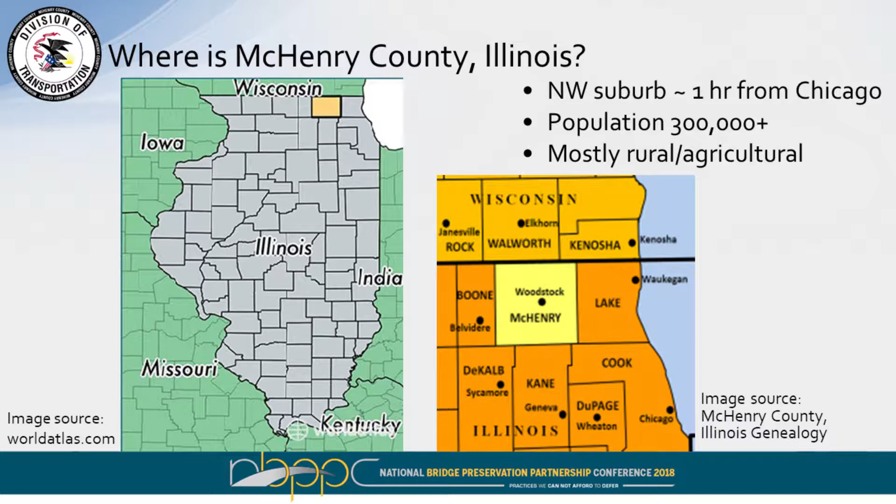McHenry County is really rural, very agricultural. There's one main corridor that's a 6-lane road, and other than that, most of the other highways are 2-lane. They carry farming equipment and there are truck routes throughout different parts of our county. But it's a lot of county highways, which is really pleasant when you drive to work in the morning, I have to say.

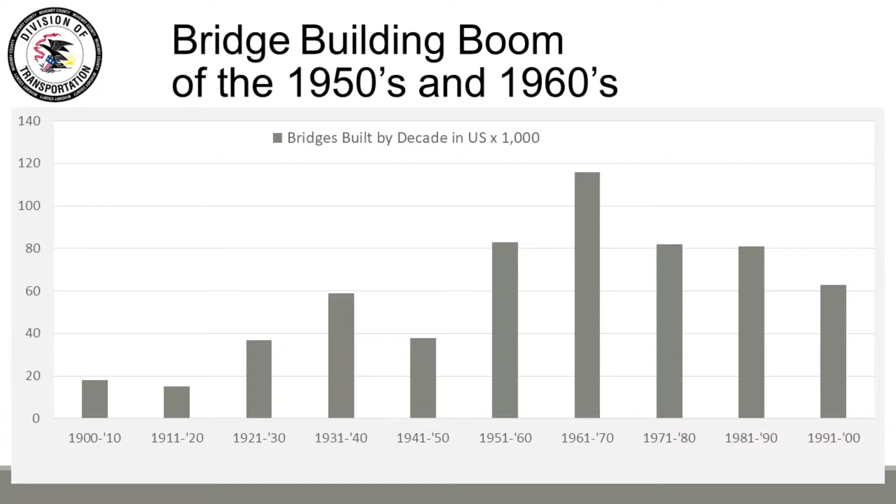This slide is a little bit about our history of bridges in general. With the automobile in the 1930s, we didn't have too many bridges built in the early part of the century, but as we get into the Industrial Revolution, we have trucks delivering materials. We had a big spike of construction in the 50s and 60s, and then it tapered off.

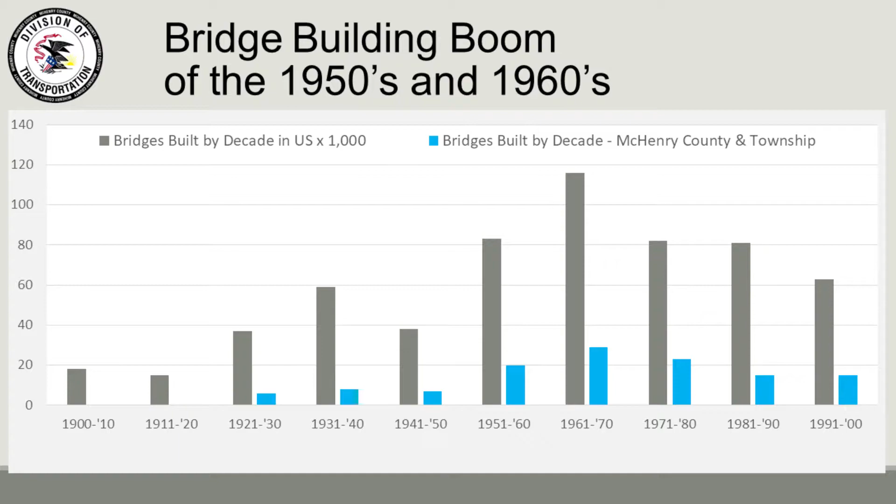Similarly, our bridges in McHenry County have the same kind of trend. In the 60s, we had most of our bridges constructed. I just wanted to give a brief overview that we had a similar timeline when we built bridges to expand our network in our county.

So what does our inventory look like? We have an inspection company called Willett Hofmann that does our annual or biannual inspections, and they helped put this together. I actually stole a lot of these slides from my supervisor at Willett Hofmann - I'm going to say, sometimes taking the easy way out. But Willett Hofmann does our inspections and itemized our bridges in this nice little summary.

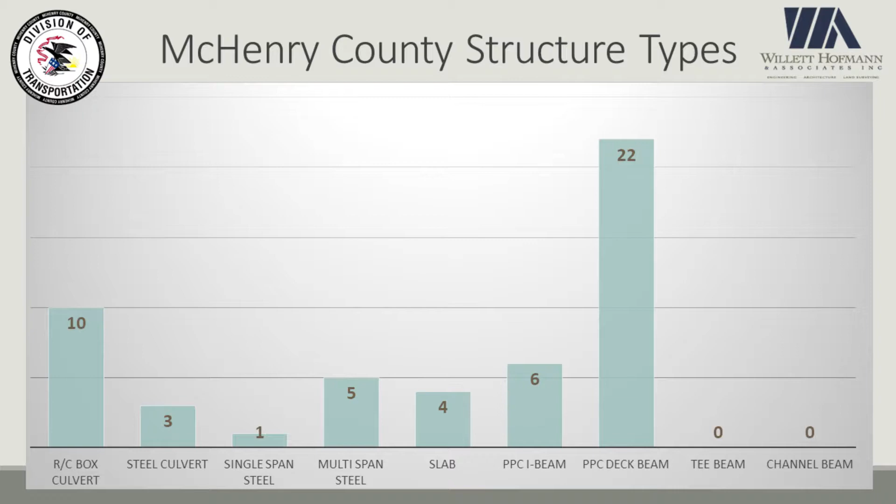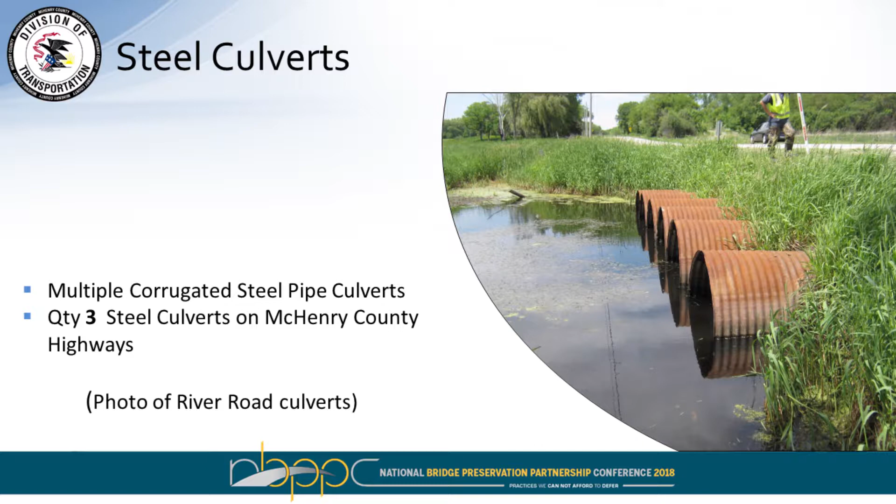The presentation we just listened to on culvert lining is of interest to me, because I know at some point these culverts, 6 sets of culverts that are underneath a fairly busy road, are going to need some attention. We check those periodically, go out and look to see if they're corroding on the bottom. They're holding up fairly well, but they're always in standing water. So unfortunately, it's just a matter of time until these have to be addressed.

Do we do a culvert or some other format? It might be less expensive and easier to do the lining process that Scott Kelly talked about in his presentation. So I'm certainly going to follow up on that, and that's exactly why I came to this conference - to see about alternatives. We have about 10 of these box culverts.

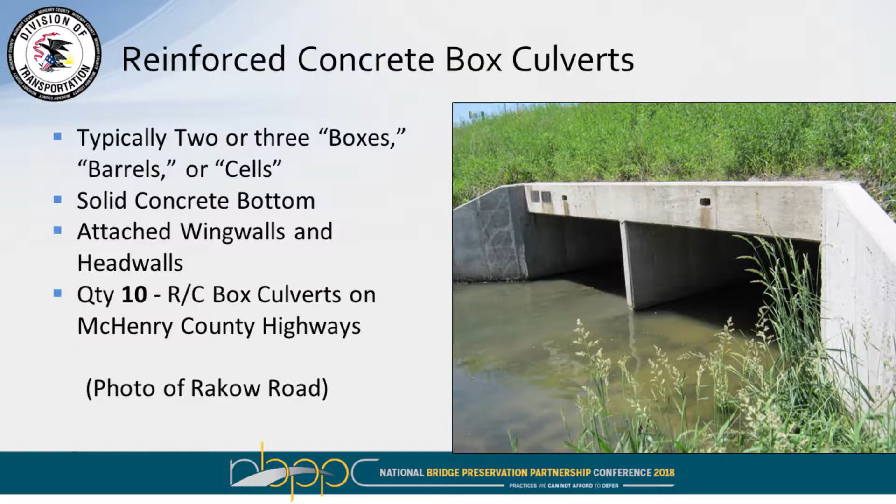Some of them are double, some are triple. In fact, we had a box culvert right down the road from our office where we replaced the wing walls. They're holding up fine - most of them are doing a good job, not really creating any troubles for us. But the wing walls on Nelson Road, that one we had the contractor remove because they had separated from the edge of the box culvert. So they pulled the old wing wall out.

They put temporary shoring in with steel piles to hold the embankment, and then placed steel piles exactly in the same footprint where the existing wing wall was on both sides of the road. So now that should hold up a little longer, and the floor of the culvert looks fine. There's some surface cracks that we fixed with epoxy, but overall, now at least we won't have a cave-in.

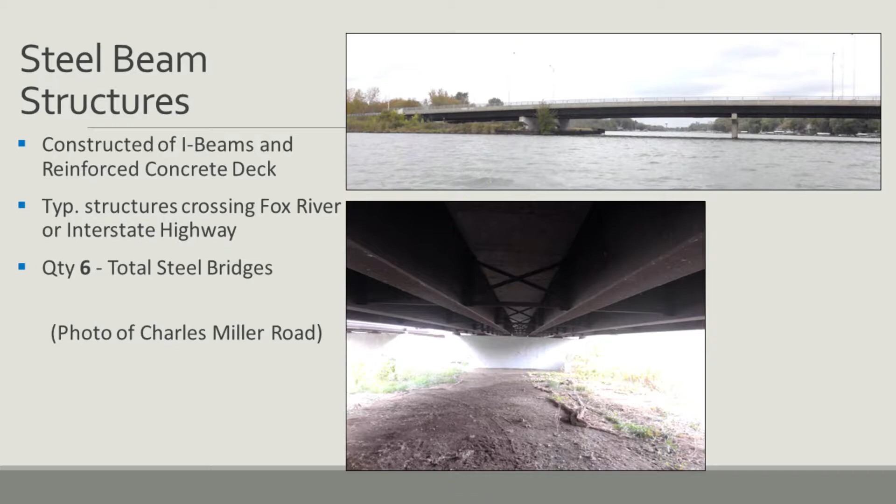Okay, so this is our flagship bridge. This is the longest bridge in our inventory - about 650 feet. It's one of our few steel beam bridges. There's a northbound and a southbound, or I guess an east and a west.

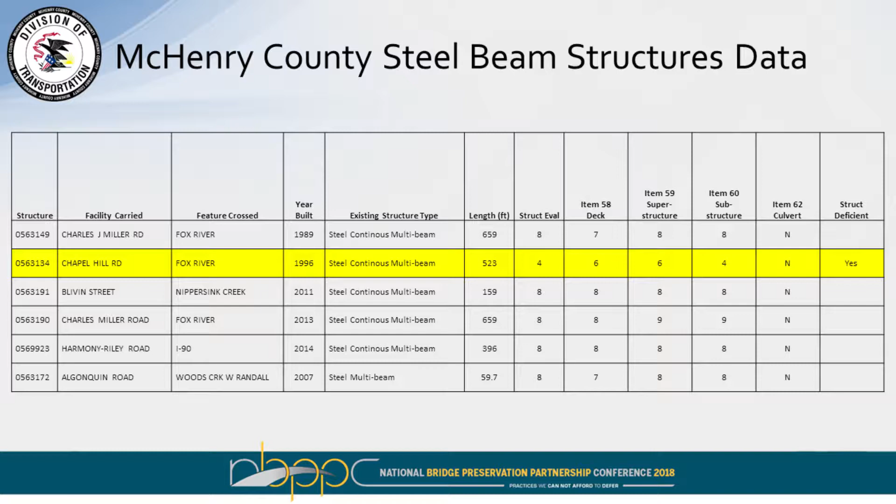I apologize that the font is a little small. But what I want to point out on this slide is the Chapel Hill Bridge, because that's going to get some repair work this season.

All the other bridges are relatively new. They're built in the 2000s, and then we have this older one from the 1990s. So Chapel Hill is in our program this year for construction, so I'll show you some brief pictures of that.

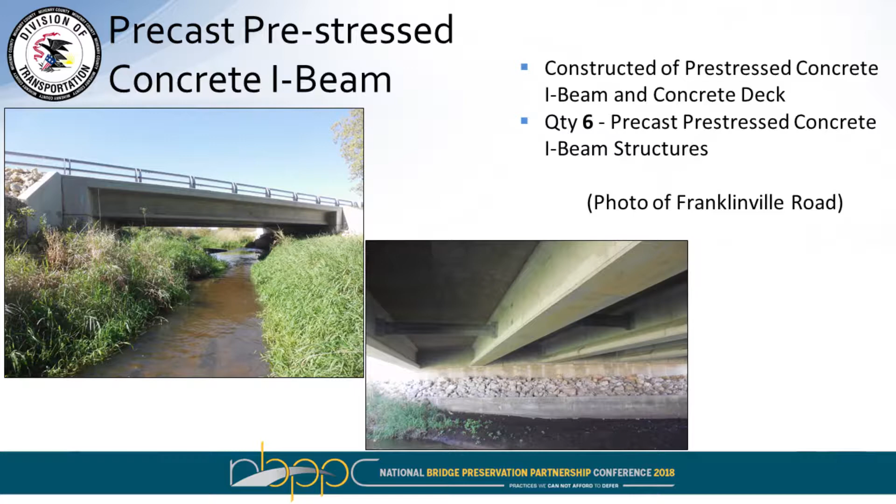And then finally, some of our other categories. We have some pre-stressed concrete beams, not too many of these structures, kind of a smaller span, and some slabs, again 4 of those. And then finally, our PPC deck beam structures.

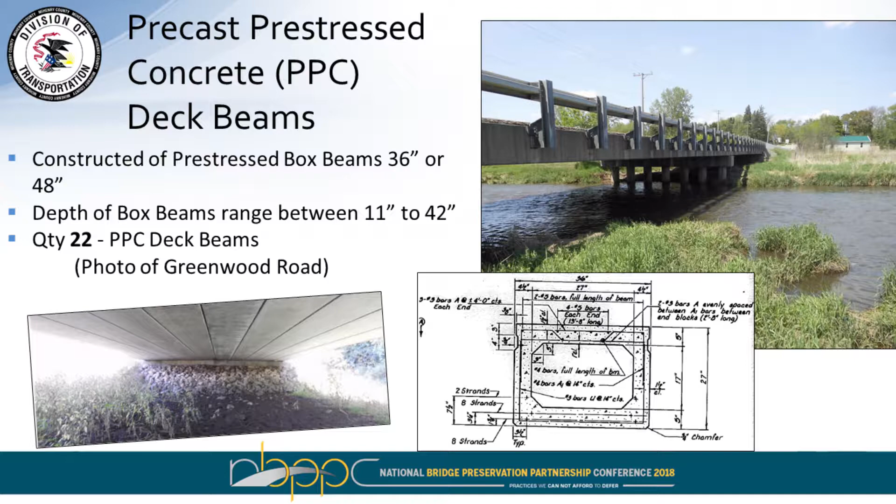They range in sizes depending on where the location is. We've got the 36 or 48 inch, and then the depth of the beams are anywhere from 11 to 42. So it's a wide mixture.

I just learned from one of the exhibitors that there's a possibility for an alternative rather than replacing them in kind with pre-stressed beams and putting that type of technology back in, which seems to eventually fail. He commented that there is a product called Next Beam. So I intend to go look that up when I have time.

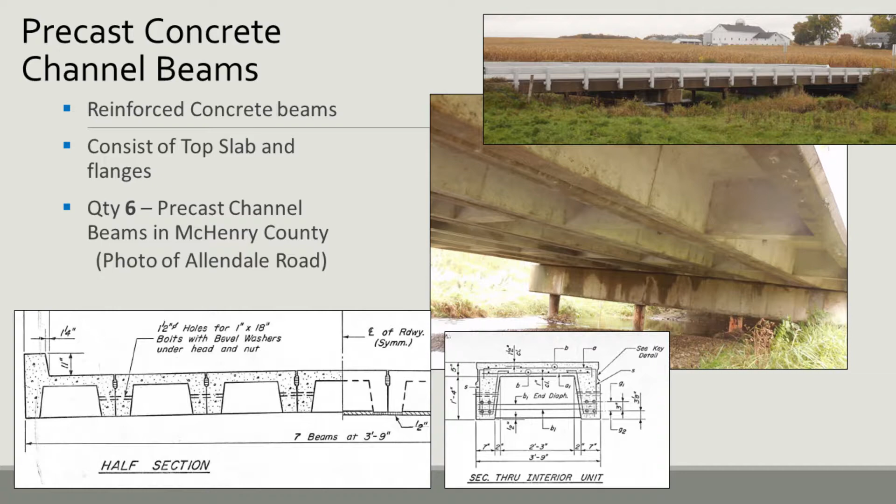And then we've got the channel beam. This is actually quite beautiful, but nice long span on that bridge.

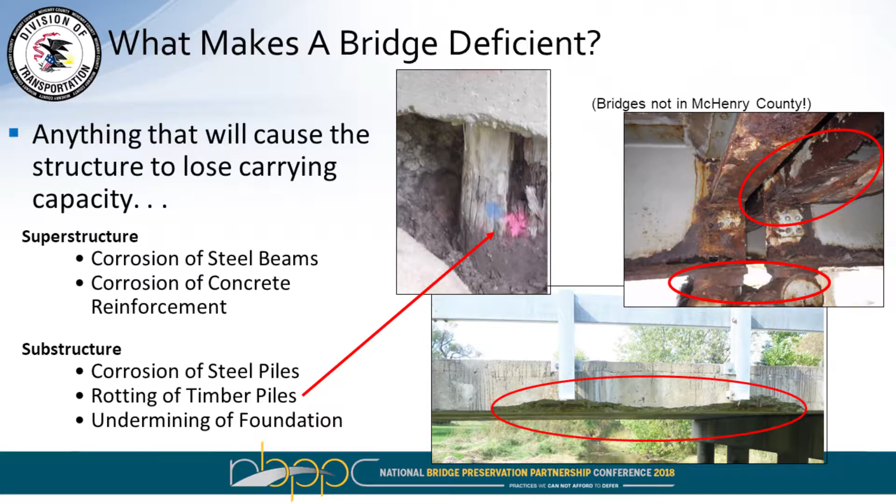Obviously, what is it that makes our bridges deficient? Same thing as anybody else. If it's not able to carry the load and the inspection shows a lot of corrosion on the beams or on the rollers or the bearings, or if you have a lot of spalling material on your concrete so that your rebar is exposed. Or finally, if your substructure is failing.

We only have one bridge, I think, that has timber structure, but that one is getting some more regular inspection. So in our program, we've repaired or rehabbed 34 bridges.

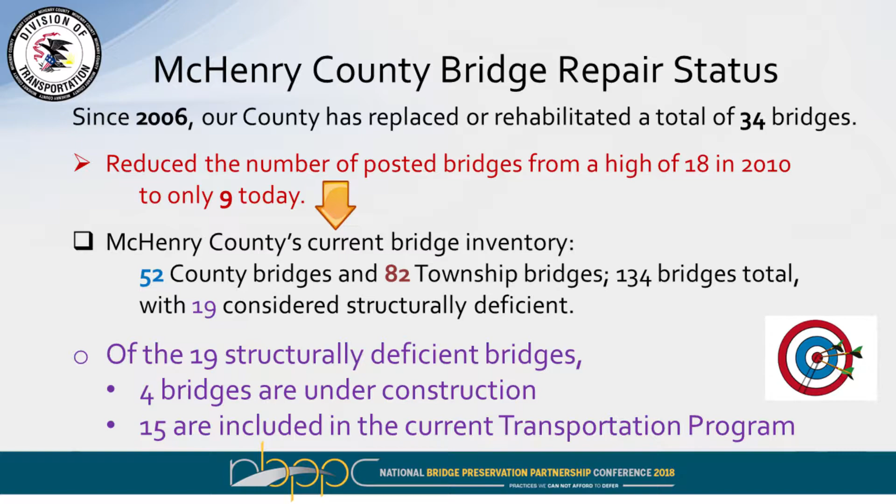And we've reduced by 50% our posted bridges. So we're trying to get that number down because the farmers and the heavy equipment are frustrated that they can't use the nearest access road, yet they have to go around the long way.

Our inventory is about 130 altogether because we oversee the township bridges as well. We provide engineering and administration for the township program bridges. Depending on what kind of funding they have, they usually use motor fuel tax, and I'll have an example or a case study where I talk a little bit about a township bridge that was just recently done last summer.

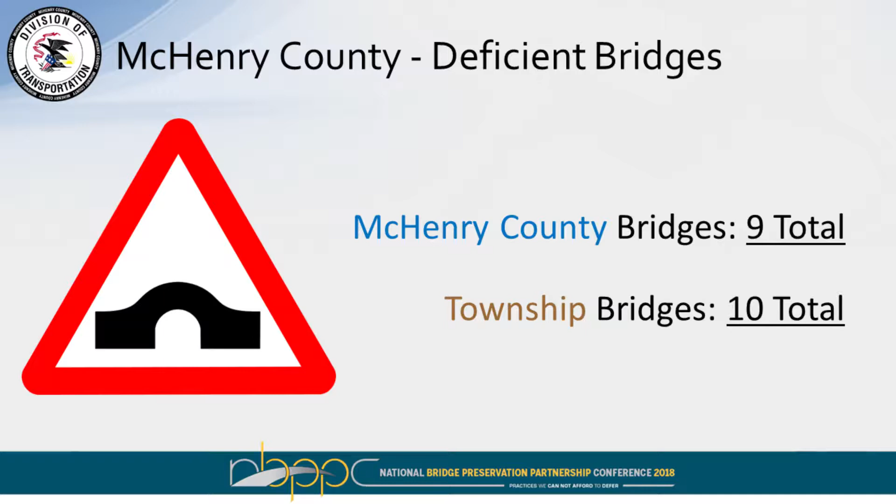So our split is a little heavier on the township side. In our inventory at the moment, we have about 20 bridges that are structurally deficient, and 4 of those are going to be under construction this year. So we'll eliminate those, and then we've got 15 left, and all of those 15 are planned in the upcoming years, so we're right on target. I'm excited to say that they're going to be fixed in a very timely manner.

Even in the deficient category, they're split fairly evenly between county bridges and township bridges. It's not that the heavily traveled routes are the ones that are failing more. Kind of interesting, just a little piece of information there.

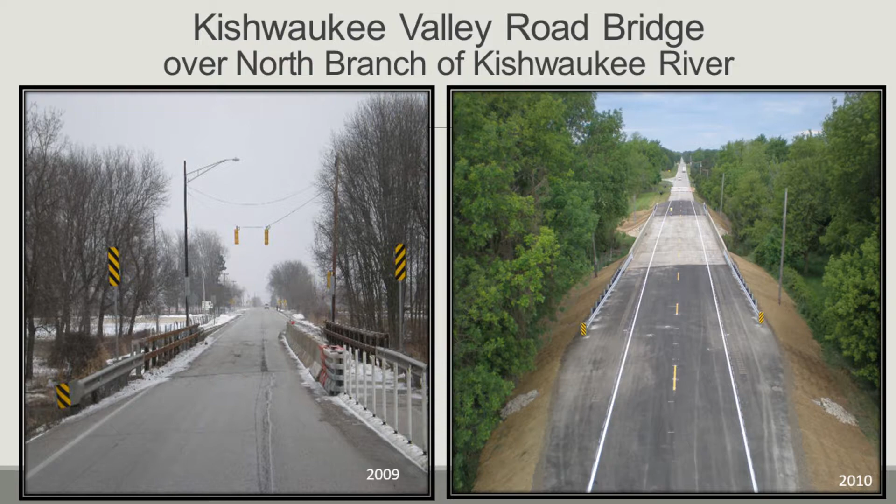Here's a little slideshow, just kind of showing an overview of before and after. This was a single lane bridge with a pedestrian access, and that's the finished product over here. Alden Road was a really nice little community, you can see some houses back there. This is a township bridge, so we put some railings on it.

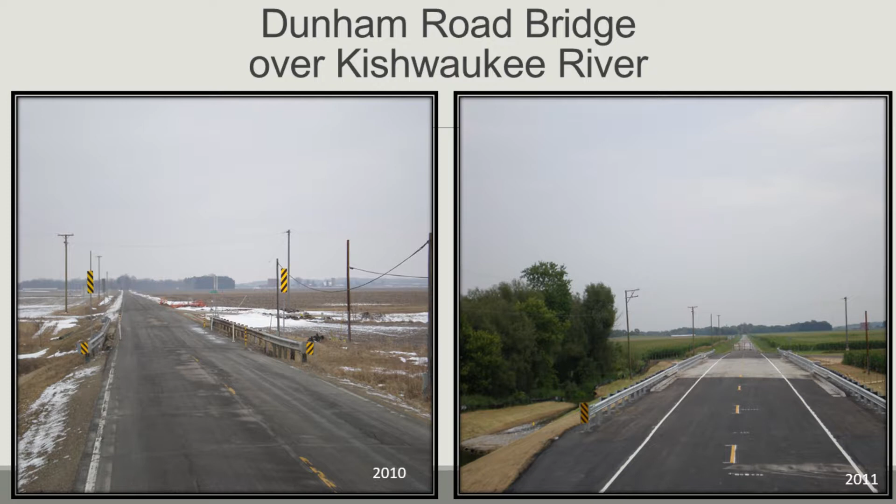Dunham Road, out in an agricultural area, you can see the corn growing over here. We put 8-foot shoulders on it, so it's got plenty of width. Lawrence Road, another nice widening. So these will kind of run through. Graf Road, shorter span, so not quite so wide.

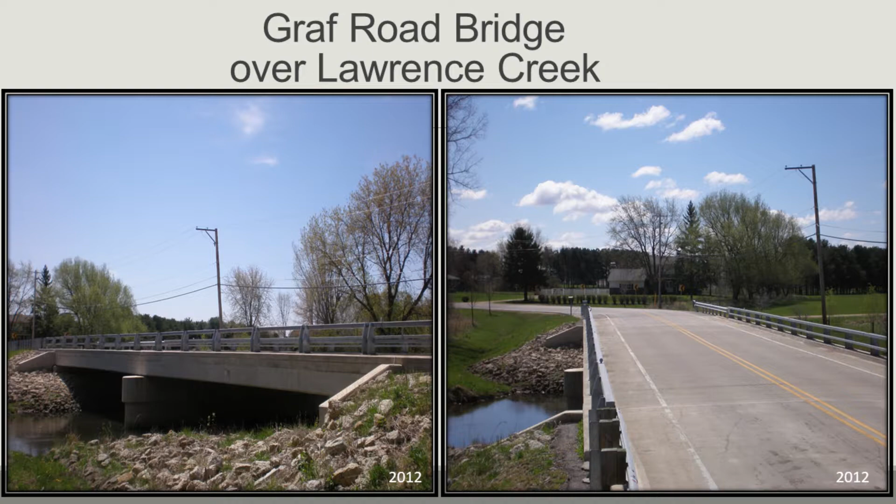And this was 2012, so we're coming up. Bliven Road was another nice architectural feature. We stamped the concrete on the parapet walls.

And Lawrence Road—do I sound like I'm repeating myself? We had three projects on Lawrence Road.

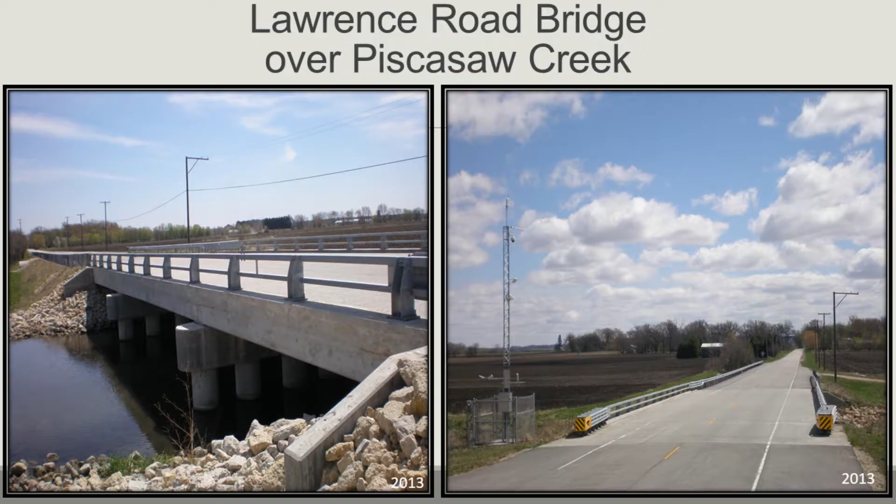Hill Road had some steel sheet piling, which is kind of interesting, with a shorter span in the middle.

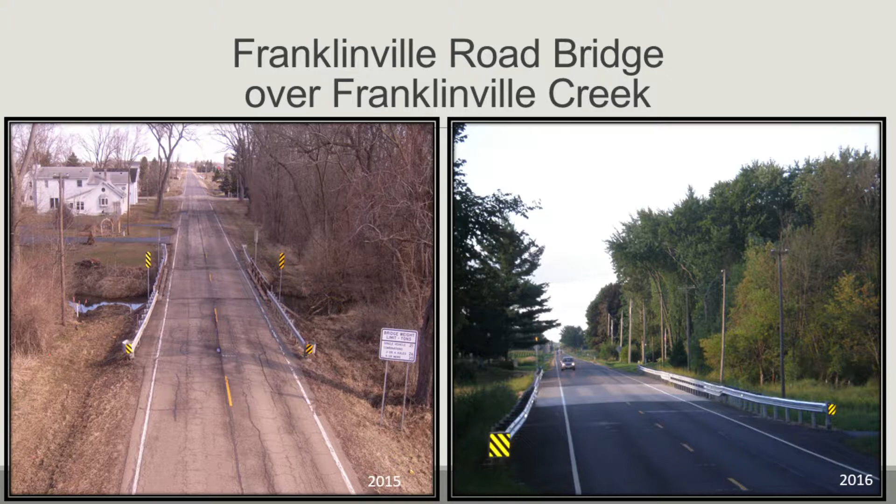And then Franklinville Road Bridge—this house used to flood, so we realigned the whole creek. This project won an award from APWA.

County Line used to be a single lane bridge with parapet walls, so you could only alternate one car at a time. So that's the finished product.

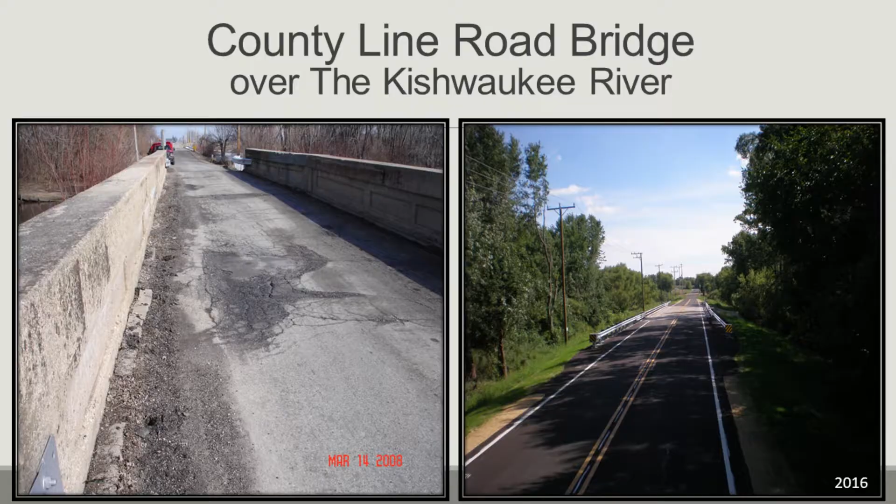And then here's another picture of our lovely cornfields right where I live. But the bridge turned out really nice.

And then Wilmot Road, we had some visitors that came through the job site after the decking was removed.

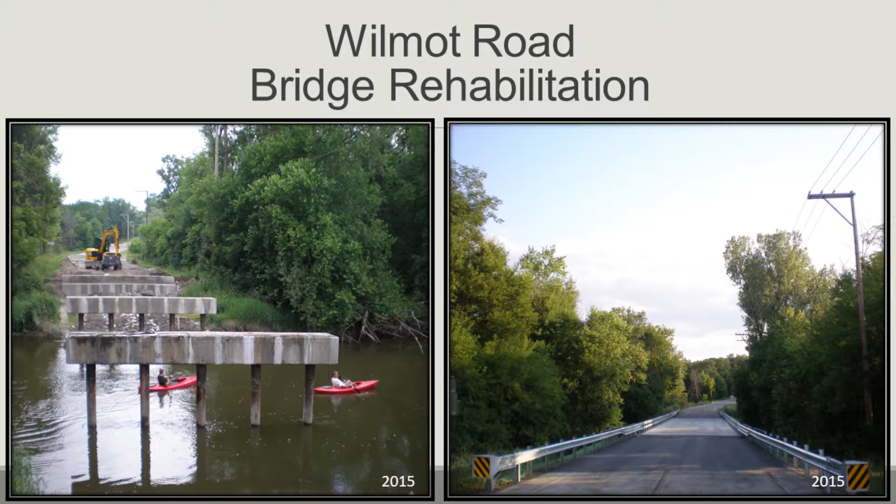And I think finally here's Garden Valley. This is the one that most recently was completed. This was just an overlay project, but I'll show you some construction details that I think you'll find interesting.

So Garden Valley was about $150,000, and it was built in the 60s. It's a box beam bridge, lo and behold.

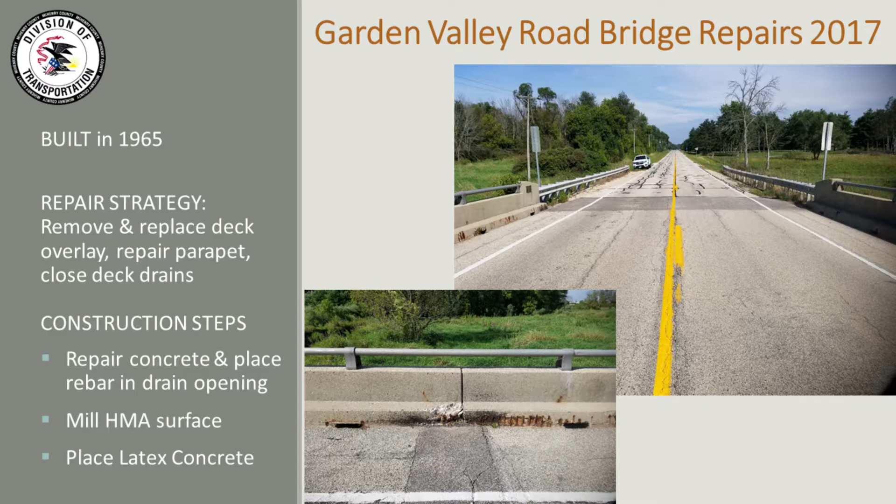And Garden Valley had an asphalt overlay, so the recommended treatment was to mill that off and then place a latex concrete overlay on top.

And in the process, the consultant recommended for us to fix some of these corroded and spalling areas on the curb lines and seal all the deck drains.

So there were some instructions on how to cut the material on either side and make it a larger opening and put rebar in it.

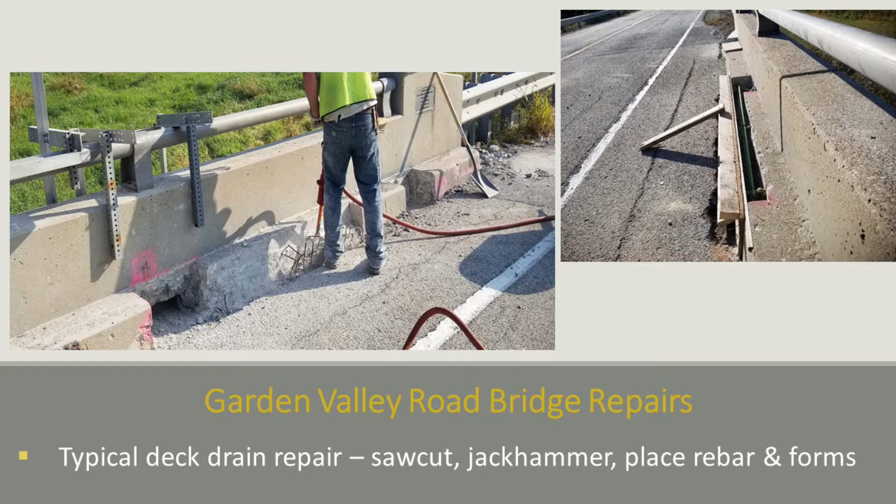So here's our contractor. He's using a jackhammer, and while he was working, he was saying, 'Man, this concrete is some hard stuff. It is really old, and for being this old, it's tough to get off.'

So he was removing some of the material that we had marked out on either side of the deck drains, and I said, 'Our plans show to make a tunnel or a hole all the way through underneath the parapet. Why even try to get your jackhammer in there and create all these chips of concrete that are going to fall in the creek?'

I think we're plenty fine to do just the repairs here and seal it, put the rebar into the deck opening through here, and then across, so the concrete, when it flows into the opening with a board on the backside, has somewhere to flow into. At least that way you don't have to do all that work to do 24 deck openings through a parapet wall when the curb was even very tough to remove.

And then over here you have the forms that they placed and the long rebar that they used to repair one of the longer sides.

So then here we removed the HMA and milled that off and discovered that some of the pier joints were a little spalled. But looking at them, we just decided to blow them out and clean them up really well, and then decided we didn't want to put a new type of material in there. We wanted the latex concrete to just flow right into those pockets.

So this was the most interesting part of this job. Has anybody seen latex concrete being poured? It's green, like teal green, and it smells plasticky because it's got latex in it. And then as it starts to cure, it turns this really beautiful violet purple color.

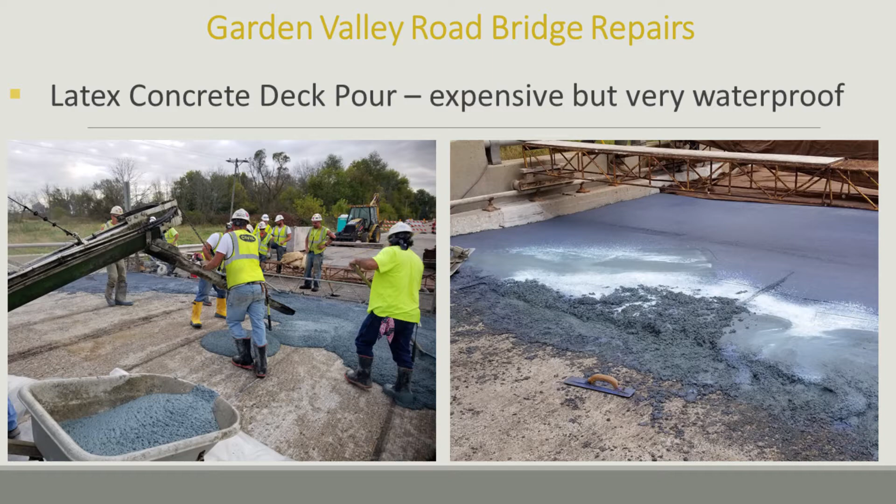Very interesting—it's like... and then this white material here is actually the floating material they use. You can't float it with water like normal concrete where you spray it. You see them mist it with a bottle, and then they use the bull floats or the regular hand floats. This uses a special liquid on it because the water would just stick to it.

And finally, a little picture of the screed. This gentleman here is sitting or walking along on the rail. There was an identical person on the other side, and they had a hand crank, and they were advancing the screed at a continuous speed, but manually, and then it had a little motor here that provided vibration.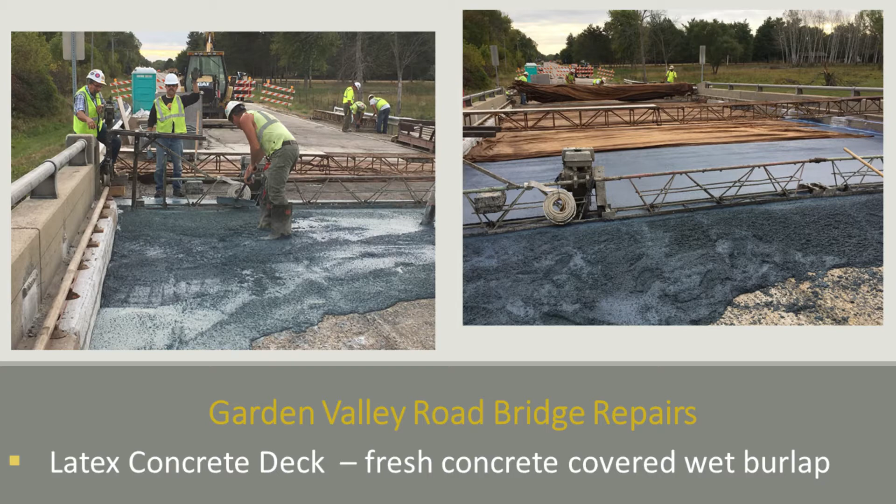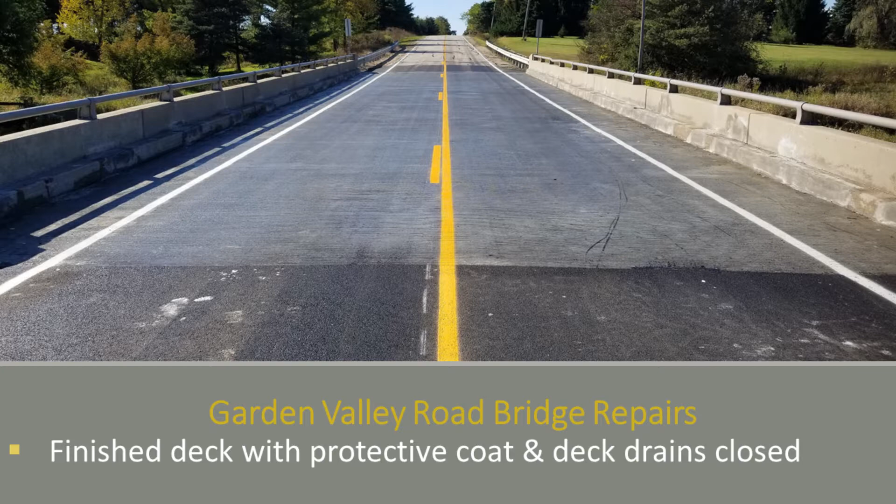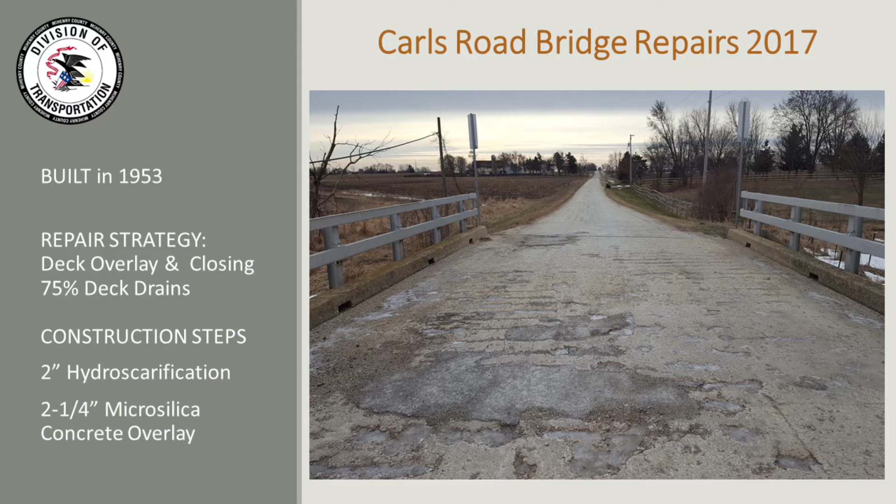So Carl's Road, again, was a township bridge. This is the other project I'm going to feature from last year. This is an older structure, again, 1950s. It's a deck, it's a full slab. And it's our belief that the rebar floated while they were pouring the slab, so the rebar was too close to the surface. You can see all these lines here, all these ridges. And then, of course, the big holes where concrete was popping out, and they just filled it with some asphalt just to make it a smoother ride.

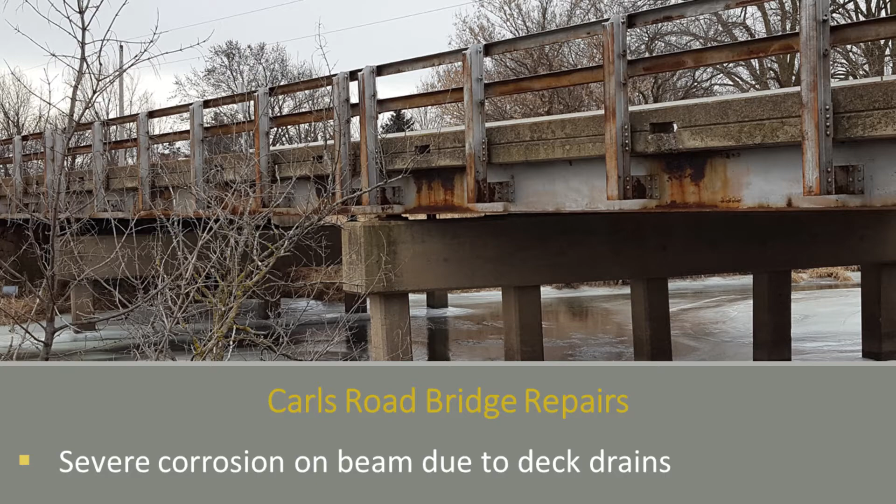So the recommended treatment here was 2 inches of hydroscarification, and then we did a microsilica overlay. A little picture of the side. The deck drains were bleeding and leaking onto the girders on the beams. So they decided to do a closure of the ones that were in worse condition. So they left a few of the deck drains open, but closed off the ones that were causing a lot of corrosion.

But what was nice about this bridge is this is the substructure. It looks pretty nice, right? The rollers are in good condition, and all the beams, all the other components underneath are nice and clean. Maybe we could use a paint job, but that's down the line.

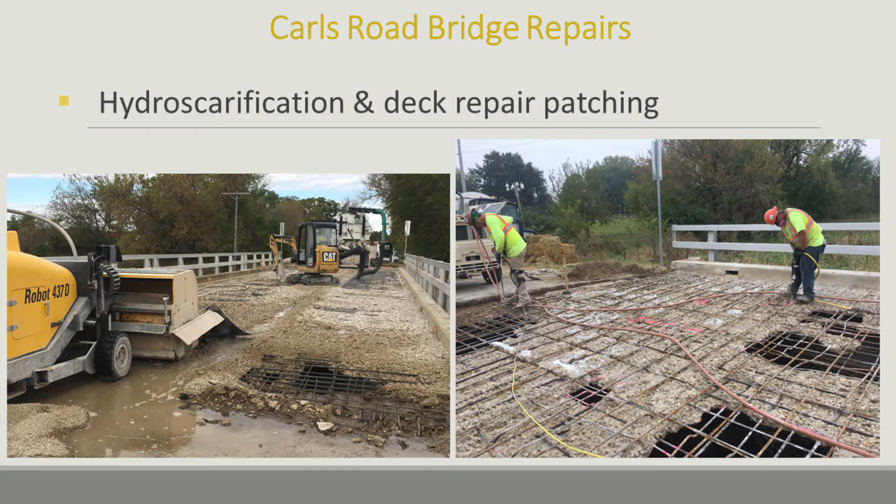So here's our hydroscarification robot. I know we saw a demo of that today. I didn't have to go watch them because I had a job site where they were doing this. They traveled back and forth in a linear pattern, and there were some holes that were blown out. You see some big ones over here. I think the largest one was like 5 by 5 or 5 by 4, something like that. So I marked off where they needed to make square cuts, and then they jackhammered and cleaned off the edges. And then they placed a concrete product in there and brushed it to kind of give it a rough surface.

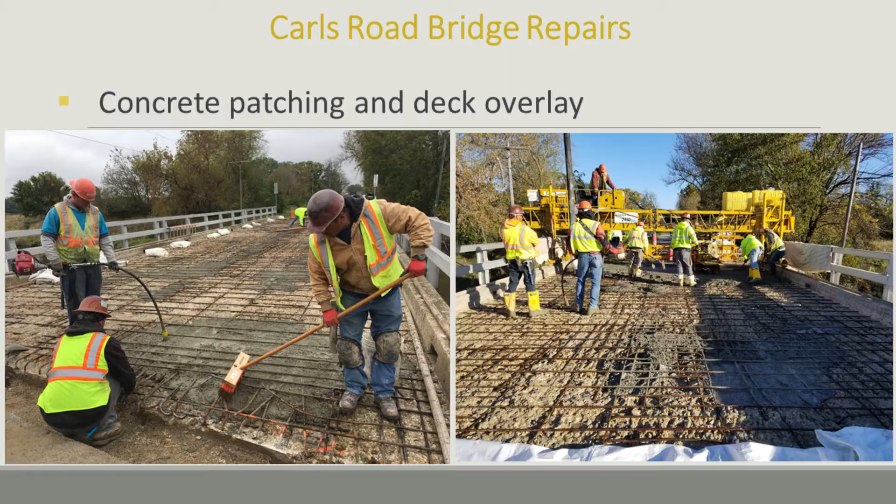And then finally, here's the Bidwell that they started on the north end and worked their way south to place the new concrete. We wanted to make sure that the deck had the rebar all the way exposed to almost the bottom of the bars. So a little over 2 inches. I believe the additional volume of concrete on this ended up being about 30 cubic yards. About 4 inches was placed, even though the theoretical quantity was just about 2. So they doubled their quantity. But that's in our special provisions. You pay the contractor for the additional amount that they needed to bring out, because some of these pockets were really deep. They were like 4 inches when you did the depth checks.

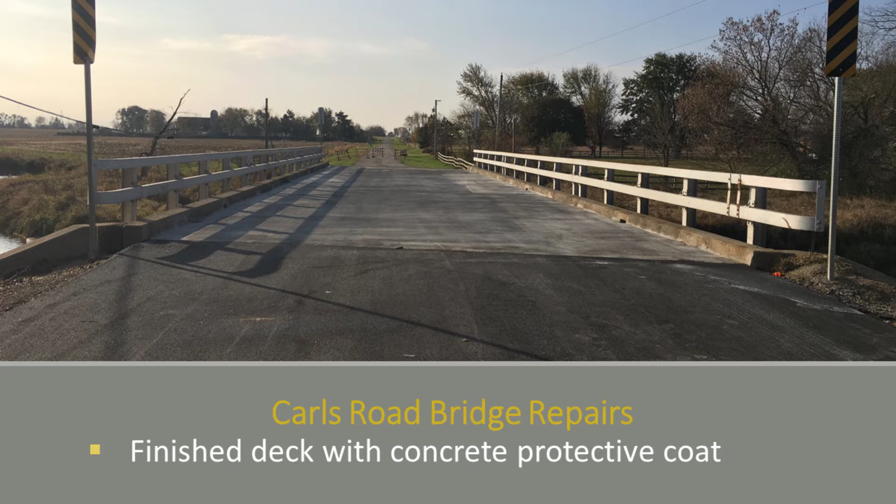So here's what it looks like today. Very nice. This bridge gets maybe 15 or 20 cars a day crossing it. And then if the cornfields are growing corn, you might get some vehicles that are transporting that. But it's not a heavily traveled road, but at least now it's in good shape and it'll last a lot longer.

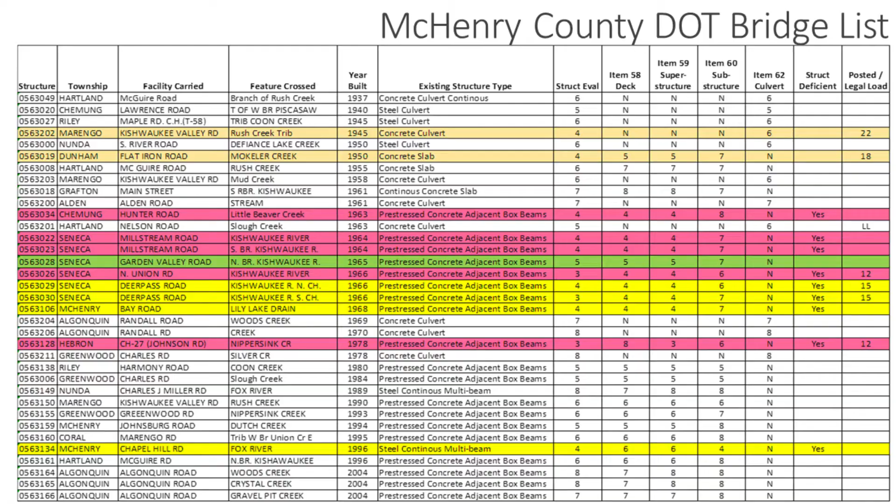So again, back to my little index, I just wanted to highlight that I'm going to talk a little bit about the yellow highlighted projects. So we're going to show you upcoming projects, which is the Deerpass Road, Chapel Hill Road, and Bay Road. I just got an email from my construction engineer that Bay Road, the temp signal was installed today. So they're going to start construction of stage 1, which is actually this side of the bridge.

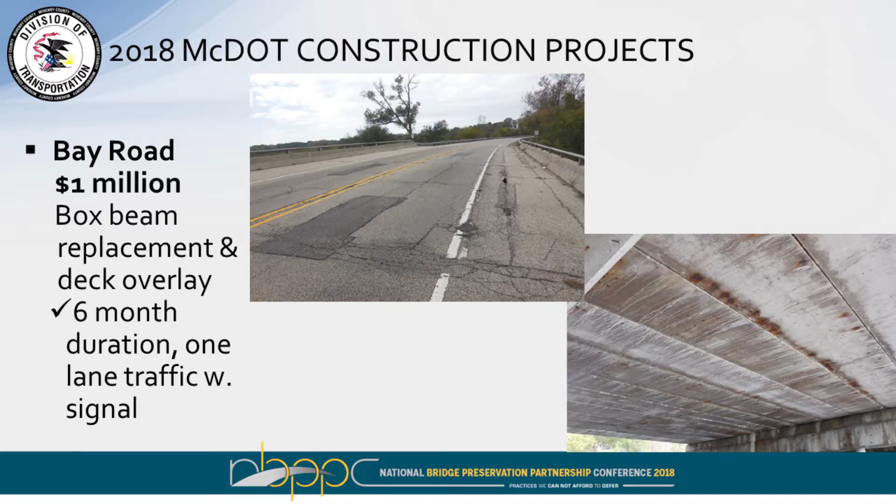You can actually see here that the keyway has failed, and this is the joint that's got holes in it. So I wanted to show you a little underneath and also on the top surface. So they'll be working through maybe June, and at that point, they'll switch traffic and do the south side. But it's a $1 million project, and it'll take about 6 months. Chapel Hill Road is a steel beam structure.

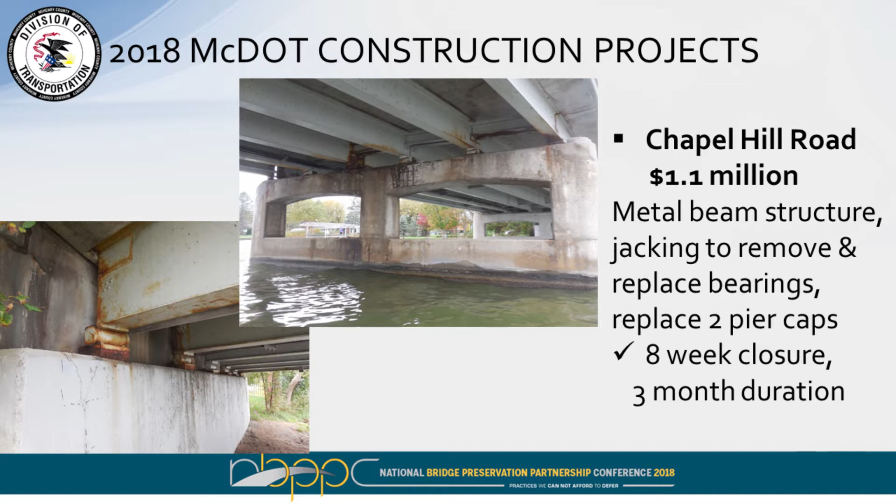This one goes over the Fox River. This needs some significant metal work, and they're getting 36 of their roller bearings replaced. So we're jacking this bridge up, which means that we can't have traffic on it at all.

We met with the village in that area and the fire department and decided that the best way to handle it is, instead of doing a closure for a week while we're jacking, and then, okay, the jacking is done, we can open, and having the barricades pulled apart and then putting the barricades back, people are gonna get really frustrated as they drive up one week and it's accessible, and then the next week it's closed. So we decided to just do a complete 8-week closure, and it starts after school is dismissed.

Hopefully we'll get it done quickly, and we're hoping that the jacking can be at a place in the construction process over 4th of July weekend that we can have the bridge available at least at that time, because everybody likes to see the fireworks over the river or in that vicinity. And then the contractor is also going to replace 2 of these pier caps.

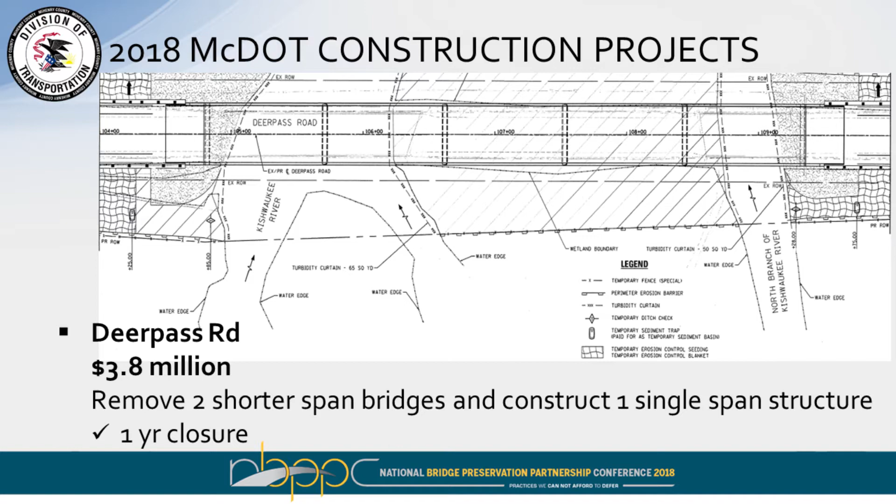Deerpass Road is a brand new bridge. We have 2 rivers, or I should say creeks. This is the Kishwaukee River, and there's an existing structure here that's kind of shaded underneath the new plan view. And then over on this side is the North Branch, so here's another small bridge. So Deerpass is essentially taking out 2 structurally deficient bridges, and then it'll place 1 long span across.

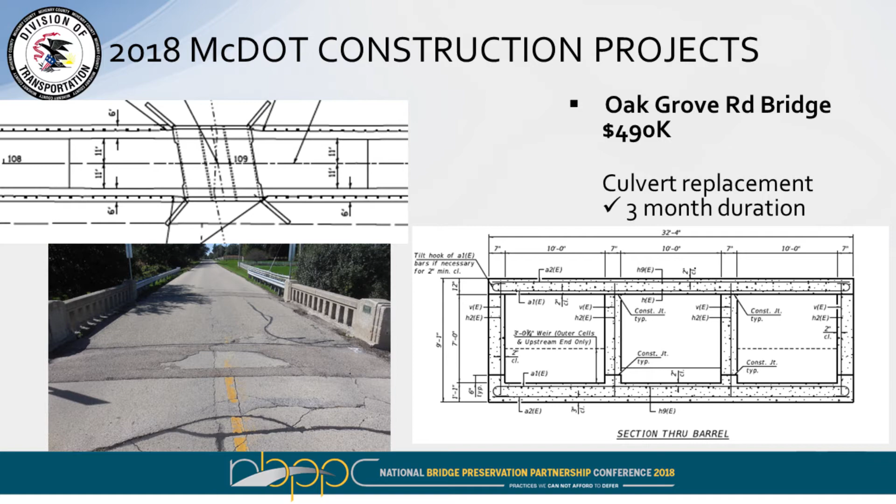This is a pretty big job for us. This is $3.8 million, and it'll take a full year. And then our last project for the season is Oak Grove Culvert. This is just replacing with a 3-box culvert.

So I just want to make sure I covered our inventory of 4 bridges and the roundabout. And I didn't mention, but we are widening a large corridor to another lane, and that's a big project. That's a 3-year project, and it's $43 million. But I'm not on that job. The roundabout is mine.

So I hope with this that I've showed you that we're small but mighty. We have jobs that do a lot for our community, and I'm proud of the involvement that I have. And if anybody at this point has any questions of my job or any of our bridges, I'll be happy to answer. How is the icing? The icing on the current bridges?

Well, that's why we placed the latex concrete, because that bridge probably had a lot of corrosion on it. Also, same thing, Carls Road had been salted. Since the townships don't have the same resources that we do, our county agency uses a non-salt option, like the beet juice, or I should say the environmentally friendly option.

So when there's a forecast for ice and snow, they'll go out and spray the road, and they have applicators that leave those brown trails on the road. So we don't use as much salt unless it's in an intersection, but over our bridges and over areas that have a lot of concrete, we try to use the beet juice as an alternative.

Typical length of detour? The typical length might be about a mile, 2 miles maybe. The Chapel Hill goes west and then south and then around. So we try to post it well in advance to let people know, but a couple of miles usually. What are your sources of funding that you use to maintain this inventory?